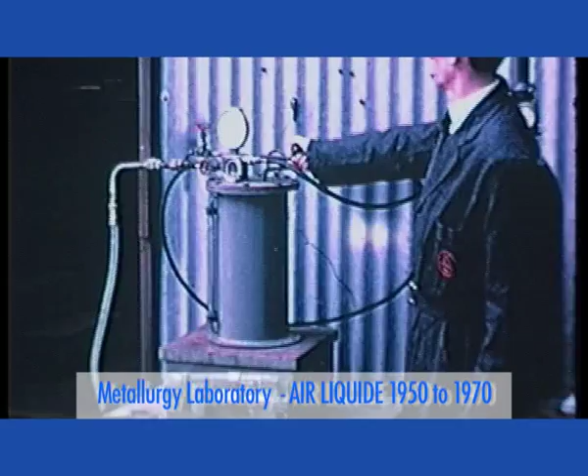In the last 50 years, industrial gases and especially air gases, such as oxygen, nitrogen, argon, and hydrogen, played a major role in the development of the new metallurgical processes. Air Liquide pioneered the importance of developing technologies for the use of industrial gases in steelmaking.

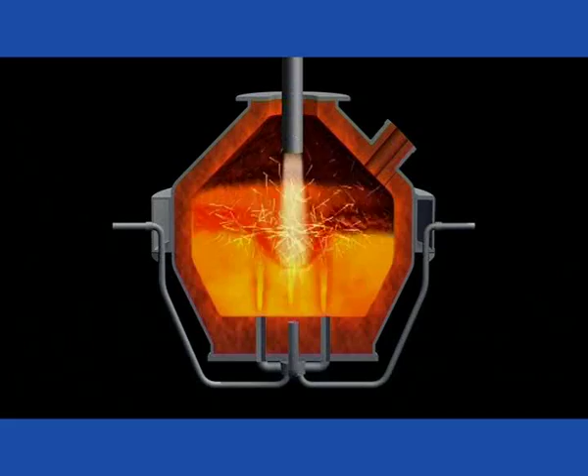In the 1950s, the development of the OBM process was made possible by a tubing system to enable oxygen injection at the bottom of the steelmaking converter. This breakthrough technology was invented by two Canadian engineers working at Air Liquide, Guy Savard and Robert Lee.

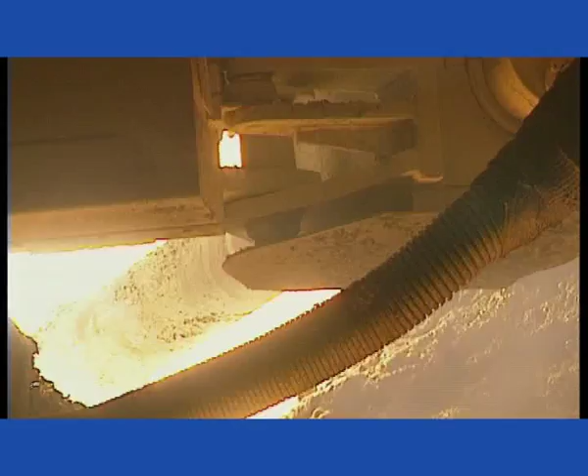The first trials of inert gas injection, such as nitrogen and argon, through molten metal, gave birth to the Gazal process. This technology is still used today in many foundries for the desulfurization of cast iron or the refining of aluminium.

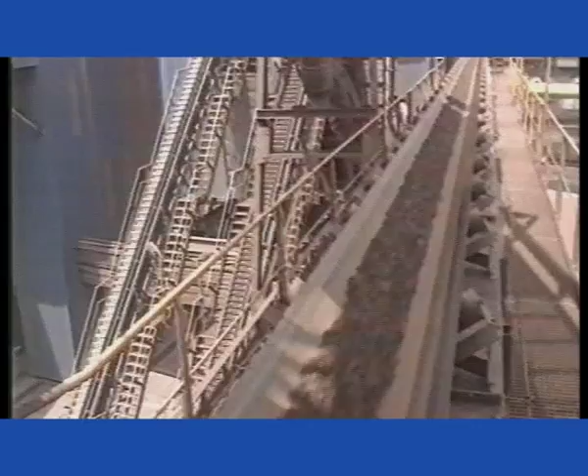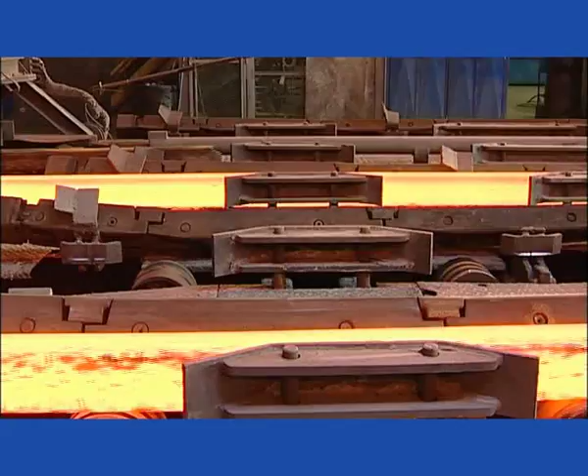In the 1970s and 80s, the explosion of energy prices encouraged the development of oxygen-based combustion technologies to reduce the consumption of energy, while improving productivity and reducing the volume of fumes to be treated. Air Liquide worked in collaboration with the industry, steelmakers, foundries, producers of aluminium and recycled metals, to develop special oxygen burners and combustion processes.

An integral part of our strategy as a major industrial gas supplier is the collaboration with our customers for the development of technologies for their industrial processes. To do this effectively, we must understand the complexities of their operations.

Common goals we have with our customers include continuously improving their production efficiency to overcome serious threats created by world competition, adapting processes to the fluctuating prices of energy and raw materials, being cognizant and respectful of the new regulations as they emerge, and finally and above all, aiming at more sales growth of new products. Each one of these elements is stimulating the growth of our portfolio of industrial gases technologies.

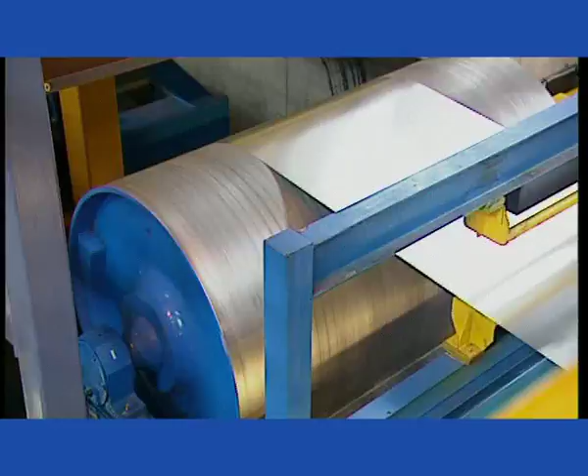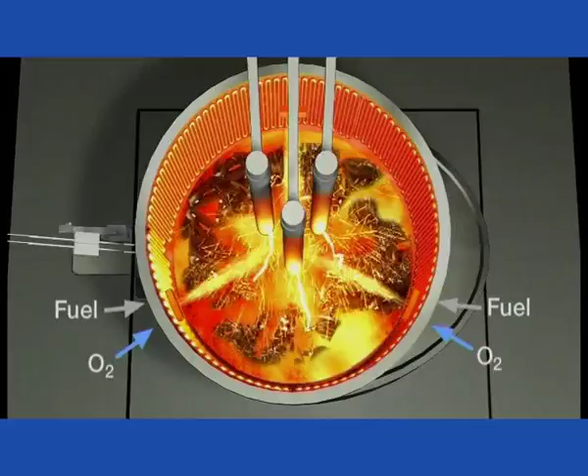Here are some examples illustrating this activity in research and development. Development of supersonic lances for safely and efficiently injecting large quantities of oxygen into the electric steel furnaces and converters. Development of low NOx oxygen burners for reheating steel before it is sent to be rolled.

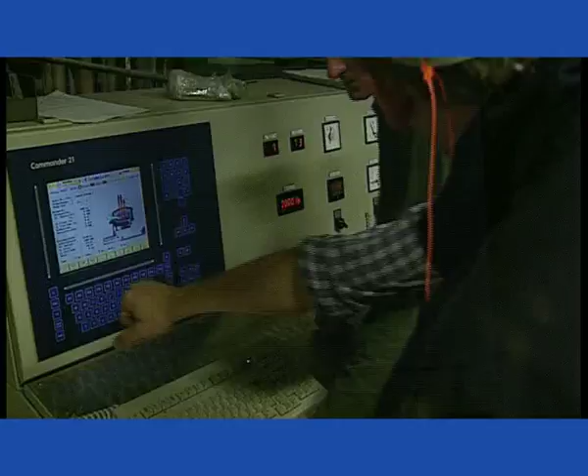Development of in-situ optical devices for the quality control of atmosphere in the aluminium and steel smelting furnaces. And finally, the development of helium-based gas mixtures used for the fast cooling of motor transmissions for the car industry. And now I would like to invite you to discover all our activities here at the Research Center and at our customer sites.

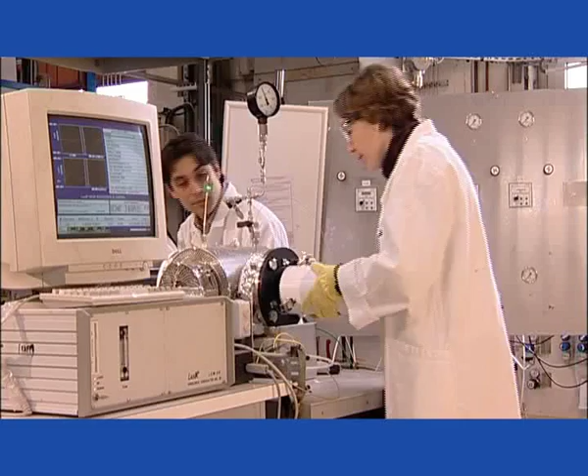The tunable diode laser is an instrument which allows us to measure gas composition. To do that, it uses the gas property, which consists in absorbing a certain number of wavelengths. The advantage of this apparatus is to carry out in-situ measurements in real time and almost without maintenance. The optical signal is sent by an optical fiber and is then recovered by a receiver, which transmits the electric signal by a coaxial cable.

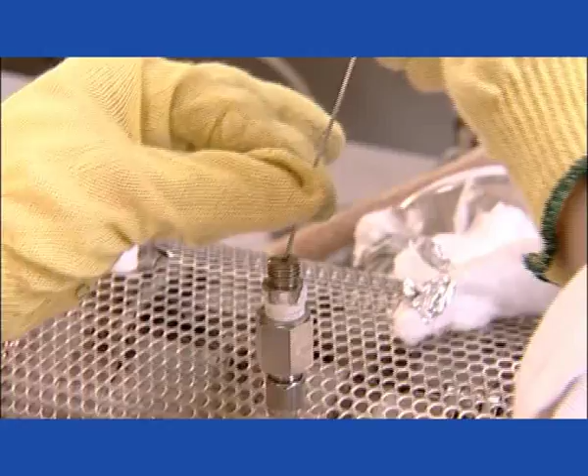Several gas species are measurable by the laser diode, in particular the gases which absorb in the near-infrared. CO, CO2, and water vapor at low temperature are some examples. Several research studies are being conducted at Air Liquide on process optimization and atmosphere control developments.

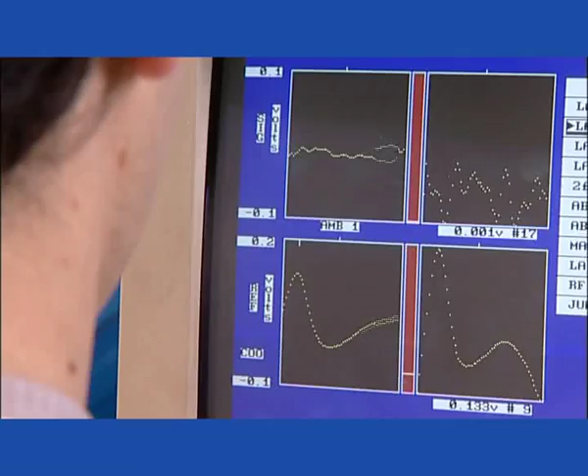In terms of process control, we're developing a diode laser-based measurement system for the electric arc furnace, where we measure CO and CO2 to optimize the oxygen injections in a post-combustion process to maximize total power input to the steelmaking process.

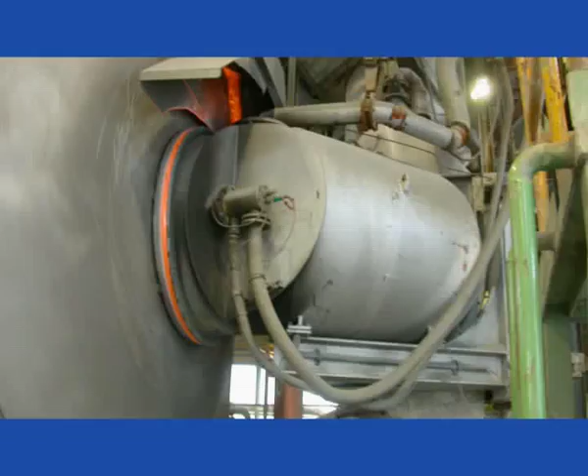After steel, aluminium is the second most used metal. Today, a third of the aluminium produced comes from the recycling of products. One of the most used methods is the rotary furnace. These types of furnaces are often equipped with oxy-combustion burners in order to maximize productivity and energy savings. Air Liquide collaborated with several of its customers on the new solution for this type of process, called Real.

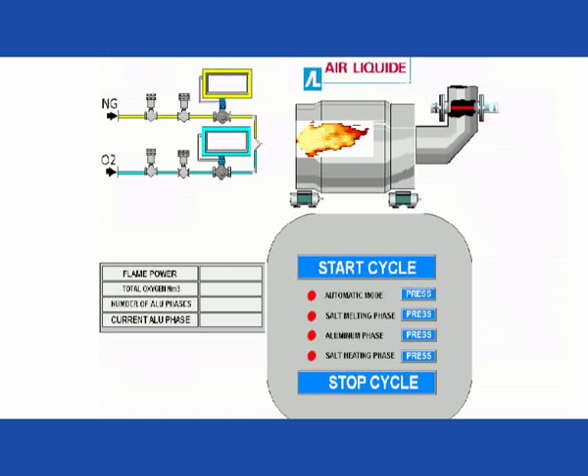Real is a continuous optimization process of the furnace based on gas analysis by diode laser. This new technology allows to make measurements at very high temperatures, in situ and in real time, in environments highly polluted with dust.

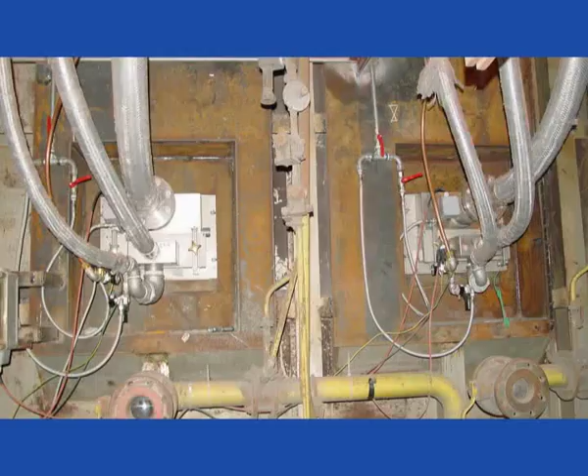The information sent by the sensors is then transmitted to a programmable logic controller, which calculates in real time the optimal furnace operating conditions. Thanks to this control system, the oxidation of aluminium is strongly reduced, its productivity is improved, and the oxygen and natural gas consumption are reduced as well. The industrial validation process showed savings up to 20 euros per ton of aluminium made.

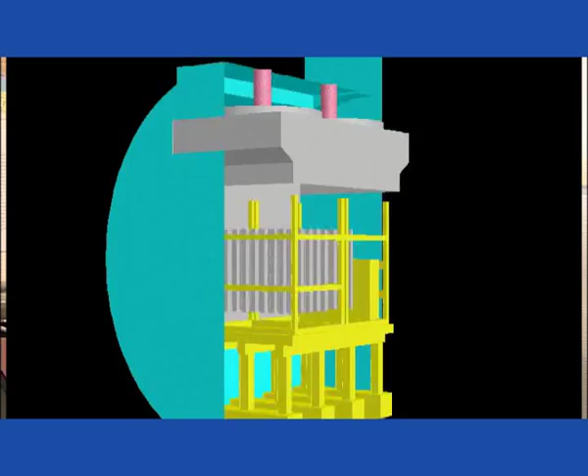A significant part of our research activities requires the essential use of modeling. Our researchers in fluid mechanics develop models which allow us to consider various parameters, such as temperature, pressure, concentration, different geometries, to evaluate their impact. We save precious time and money by avoiding difficult and often expensive experimental campaigns.

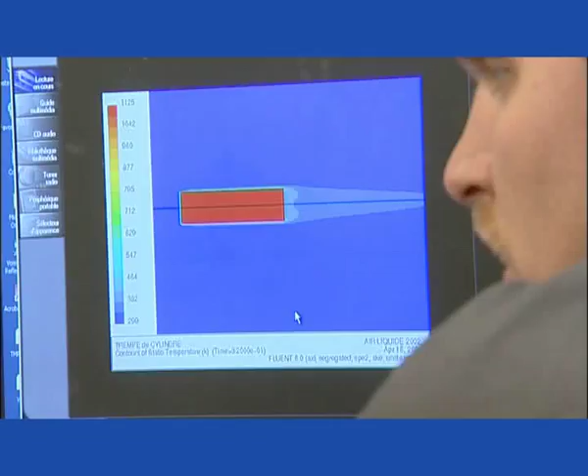Once the operational parameters of the prototype or the process are being defined by the modeling stage, the second step concerns validation on a pilot scale, which can be carried out either in the research center or at the customer site. This stage is critical to the model's validation and to the readjustment of all the preset parameters.

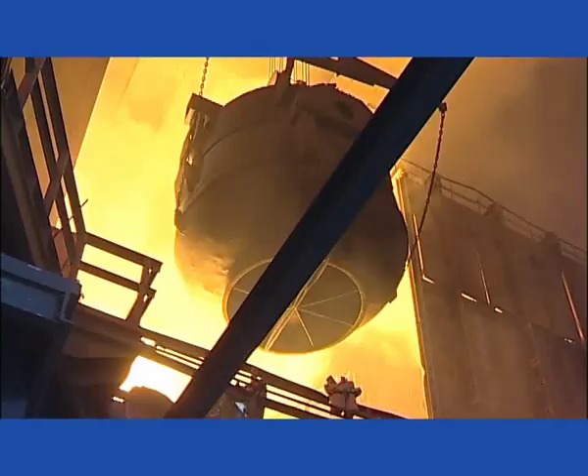We're here in an electric steelworks, where steel is produced from this recycled scrap. The first stage in steel production is the arc furnace, where this scrap is melted. Our concern at Air Liquide is not only to optimize oxygen injection in the furnace, but also to optimize the injections of coal and natural gas by proposing innovative solutions.

These consist of regulating injection of coal, oxygen, and natural gas by a continuous fume control system that uses information from a diode laser. We're able to improve its output by ensuring a better heat distribution within the furnace. An improved combustion process offers a better fume emission control system.

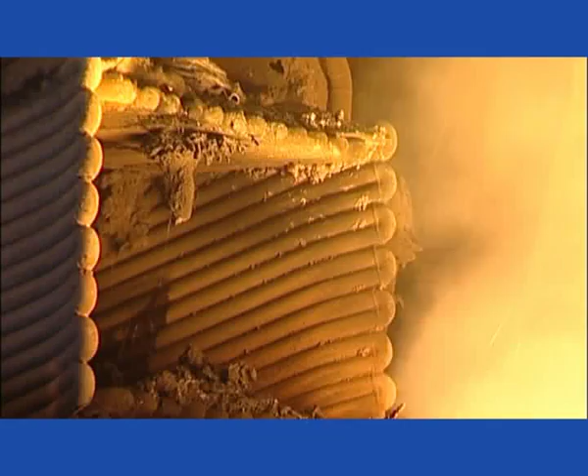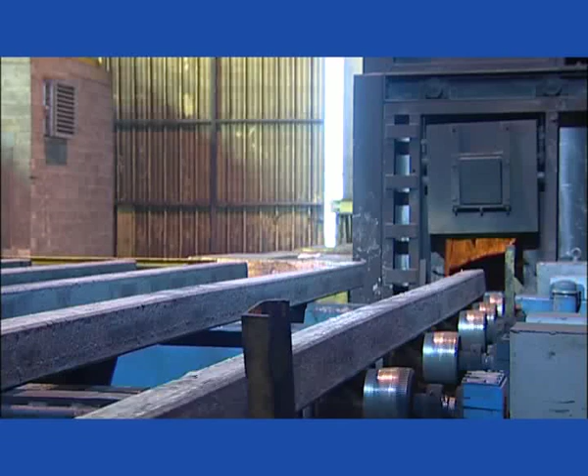Direct flame reheating furnaces equipped with gas or fuel burners and preheated air are used to heat steel up to the rolling state temperature. The steel pieces are slowly heated up while they continuously move through the reheat furnace. These furnaces, often of old designs, are a bottleneck for the whole production line.

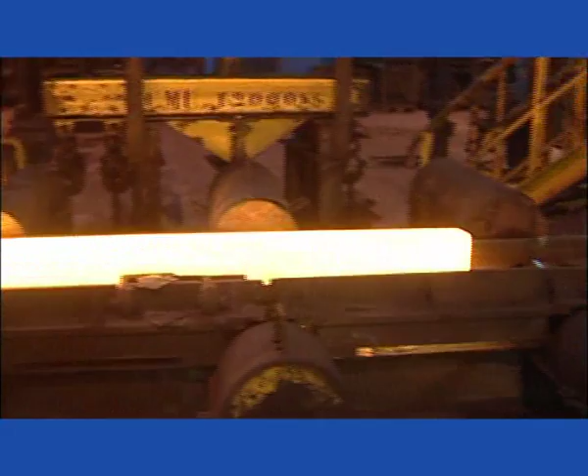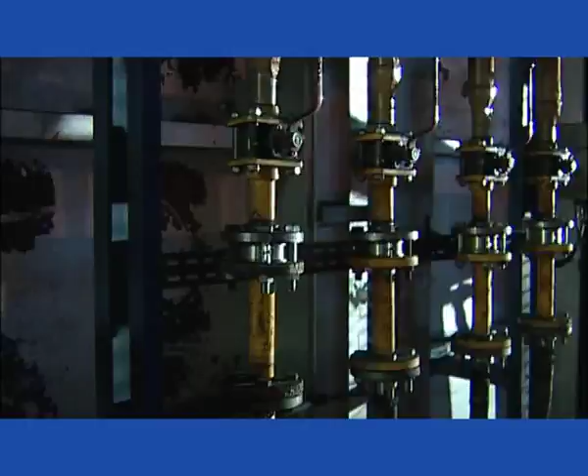Air Liquide recently developed an innovative oxy-combustion solution called ALROLL. This technology allows us to increase the output of the furnaces, depending on their requirements. The ALROLL solution consists of adding oxygen burners to the existing furnaces to increase the furnace performance.

Most of the work is performed during normal furnace operations, with a minimal shutdown for final installation. The flames generated by the burners significantly increase the thermal transfer to the load. Therefore, the reheating rate is largely accelerated.

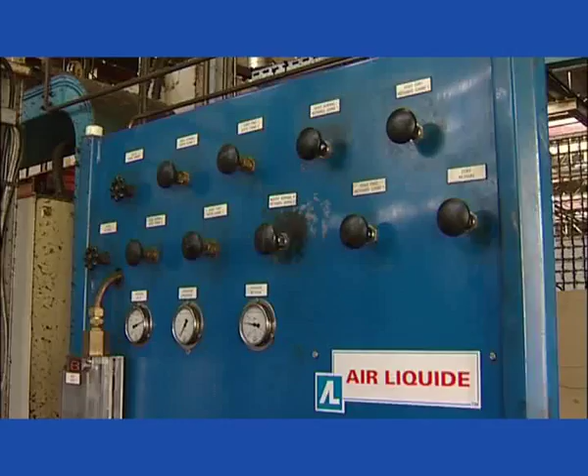We're here on the site of a transmission manufacturer for large trucks, which uses metal heat treatment for the production of its parts. Air Liquide offers customers its expertise in the field of heat treatments. The heat treatment step is essential in guaranteeing a satisfactorily long shelf life for these transmissions. These treatments depend on the gas exchange process between the produced parts and the gases supplied by Air Liquide.

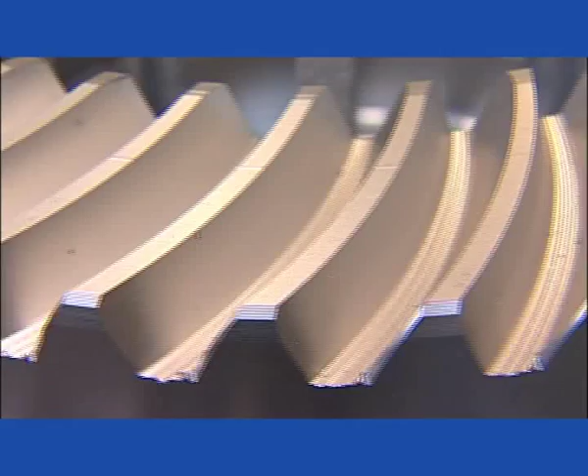The traditional heat treatment processes require important technological developments to comply with the new environmental regulations. Thanks to its research and development, Air Liquide is actively pursuing the development of new technologies, such as steel hardening by quick cooling of steel parts with gas, which allows us to effectively replace traditional processes of steel hardening in oil baths.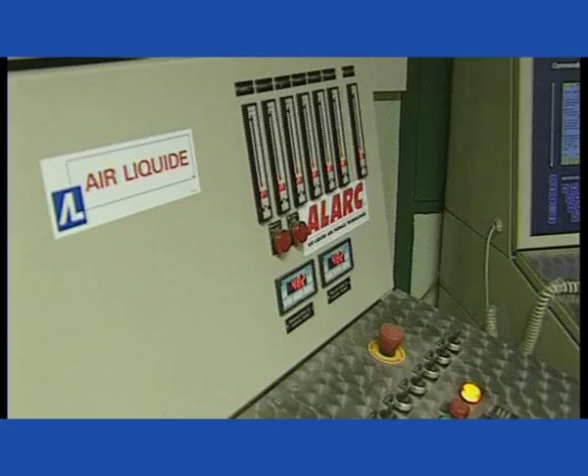As you've noticed, our activities in research and development are dictated by the evolution of our markets and thus our customers' expectations. It is then critical to work in partnership with our customers, creating common interest R&D teams while working on the same projects, to define technological action plans and their timely completion. By way of these partnerships, we offer our expertise in gas technologies, from gas production, online analysis, to continuous processes of our customers.

The primary metals and material processing group of the Claude Delorme Research Center conducts developments aimed at optimizing the environment and the performance of industrial processes involving gas-metal interfaces. In our view, the future requires a strong Air Liquide participation in the European iron and steel industry research effort engaged in the development of low CO2 emission processes for primary steel making.

Within this framework, our residual gas separation units will allow the sequestration of carbon dioxide or its recycling for other applications. Our developments also concern emerging technologies, such as plasmas for thin-layer deposits on metal surfaces, to add new functionalities.

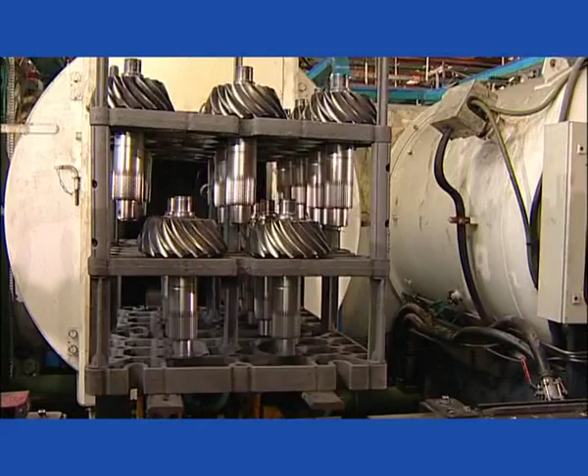These two examples show the large diversity of our project portfolio. It is supported by an extensive expertise, by the international recognition of Air Liquide and its academic and industrial partners. This enables us to offer our customers cutting-edge technologies.